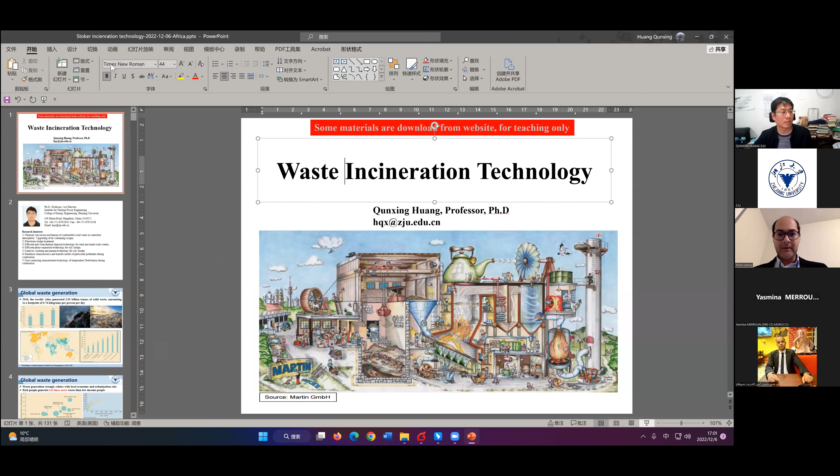It's my great pleasure to give a brief introduction about waste incineration technology. I would like to share my slides. Let me see how I can share slides. Okay, I hope you can see my screen. Okay, perfect, good. Excellent, very good. It's a full screen now. That's good, thank you very much.

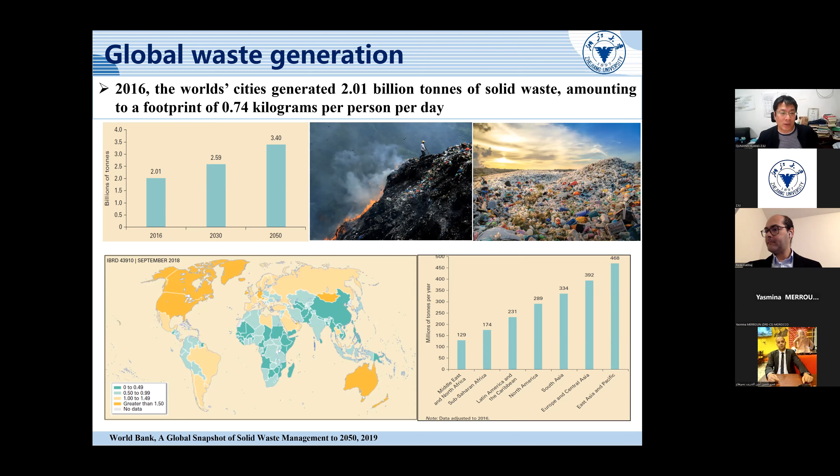A brief information about waste generation globally - I think yesterday Professor Lee already gave you this information, so I would like to move quickly. One point about global waste generation is that the value or mass discharged by every person is closely connected with local GDP. As you can see from the distribution of this waste, richer people discharge more waste, and more metal and recovered or valuable materials are contained in the solid waste.

Also you can see globally the treatment of solid waste - this information was provided by World Bank. I provided the original reference link here, so if you like, you can find the original information from the World Bank report. Overall, the waste to energy or waste incineration fraction is relatively low, only 11% globally.

But in some developed countries, especially China, Europe, and Japan, the waste incineration ratio is much higher, over 50%. Also in some countries, dumping still exists, especially non-sanitary dumping. For waste treatment or waste thermal treatment technology, comparing with other technology, waste incineration is like an industrial technology.

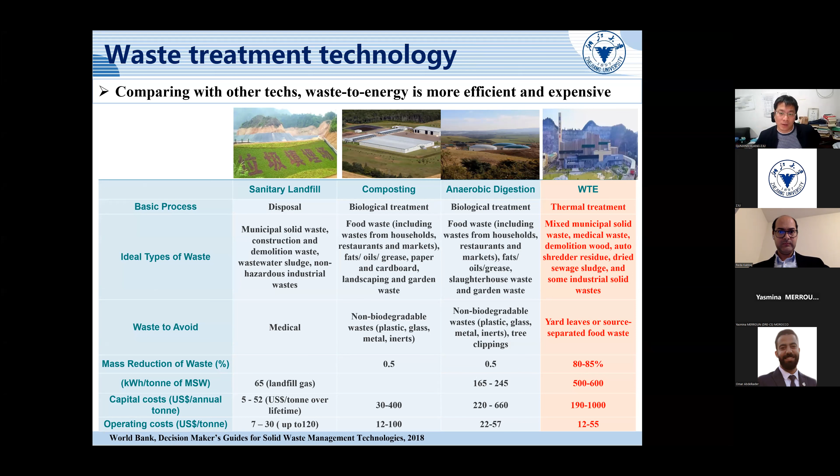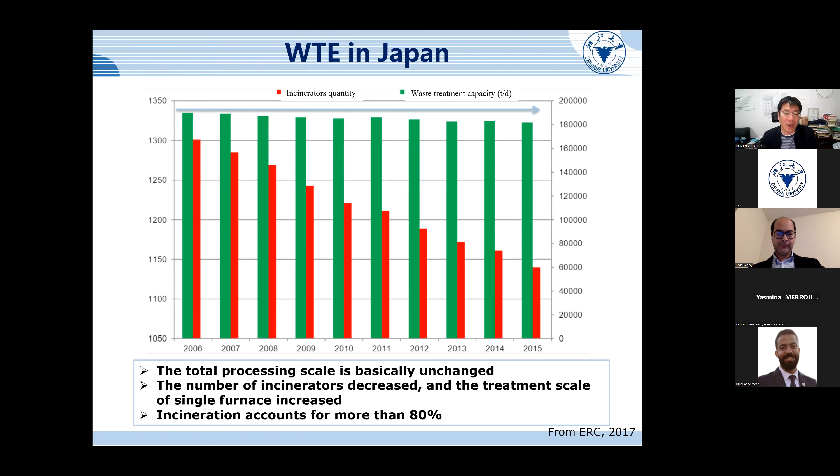In China, approximately 0.8 kilogram of waste is discharged per person per day. For example, in the city where our university is located, Hangzhou, we have about 10 million people living in the city, and approximately 10,000 tons of waste is discharged every day. All this waste is now incinerated, and the bottom ash, fly ash, or solid residue is submitted for landfilling.

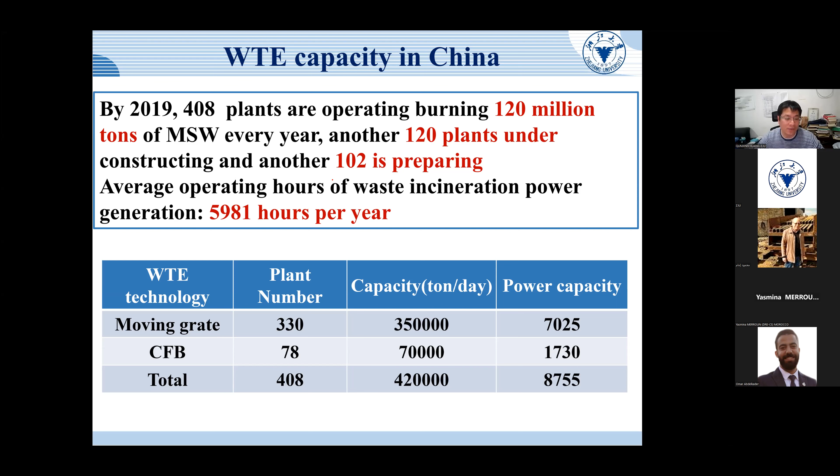In China, we have different technologies, and by 2019, we had approximately 400 plants under operation, with another 120 plants under construction, and 60% of all the waste discharged in China was submitted for incineration.

In order to improve and monitor the operation of these waste to energy plants, our government has built a website. From this website, you can see all the plants and how they are operating, including the temperature inside the furnace, and also the emissions of pollutants including particles, acid gases, and carbon monoxide. You can see what the emission data is.

It's continuous data, and you can see at all times how many incinerators are operating, and what the temperatures are, at each spot. Each spot represents a plant, and if you click on the website, you can find all this information, which is very helpful for the public to know how the plant is running, whether there's any problem, and how the emissions are.

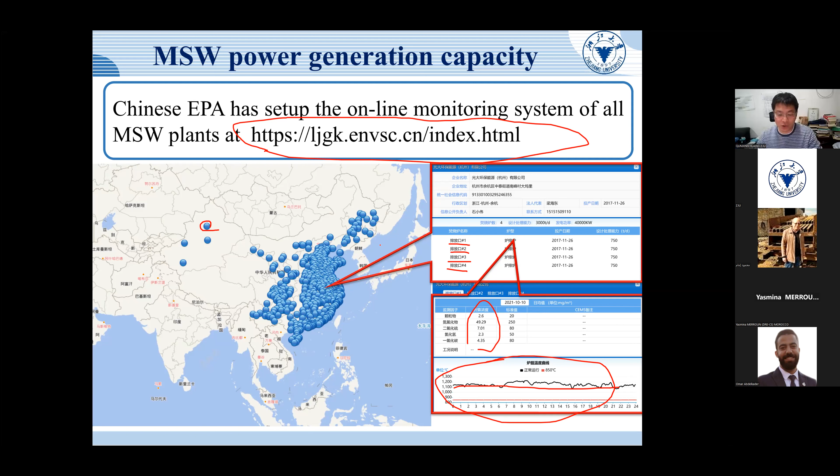There are two main technologies widely used in China for waste to energy. The first is moving grate technology, which is provided by many companies, like the technology from Everbright, and also from Martin Sanfeng and from SUS from Shanghai, among others. For the moving grate, we also have different technologies, like reciprocating, inclined, and staged moving grates.

After burning, the thermal energy contained in the high-temperature flue gas was used to generate steam, and the steam was used to generate electricity or directly sent to local residents for heating or to plants for other utilization purposes.

After the temperature of the flue gas is reduced by the exchangers, the dirty flue gas is submitted to air pollution control systems, including the scrubber, the activated carbon injector unit, and the baghouse to remove the particulate matter. Then the flue gas is induced to the stack and released to the air.

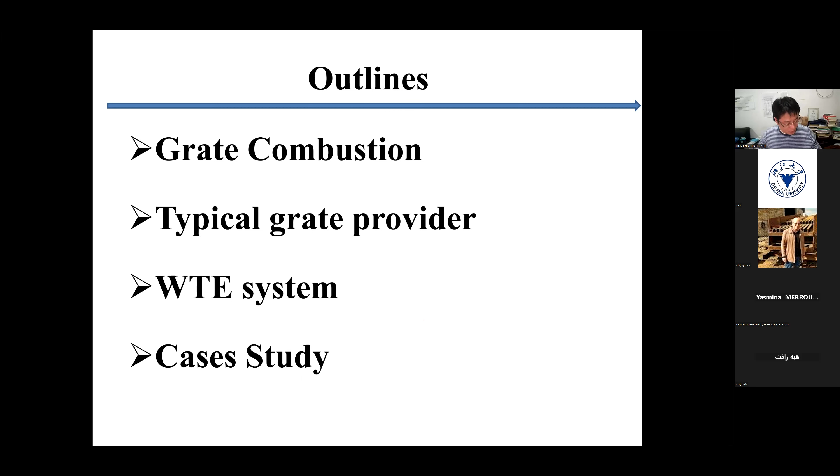Here is the waste to energy. When we are using thermal technology to treat solid waste, it can usually be classified into combustion, gasification, or pyrolysis technology. For direct combustion or incineration technology, the waste is directly burned out. A lot of air is injected into the incinerators, and all the organic matter contained in the municipal waste is burned out and becomes carbon dioxide, steam, and ash, and then the flue gas is cleaned.

Another waste to energy solution using thermal technology is to gasify or pyrolyze the waste into syngas or oils. The syngas and oil are cleaned and then burned to get energy, or to get extra oils like pyrolysis oil, which can be used in internal combustion engines or other industrial boilers for supplying energy or heat.

You can see these two technologies are different. Currently, combustion technology or direct mass incineration technology is more industrialized. For gasification and pyrolysis, there are several plants operating, but the scale is relatively small compared to the combustion systems.

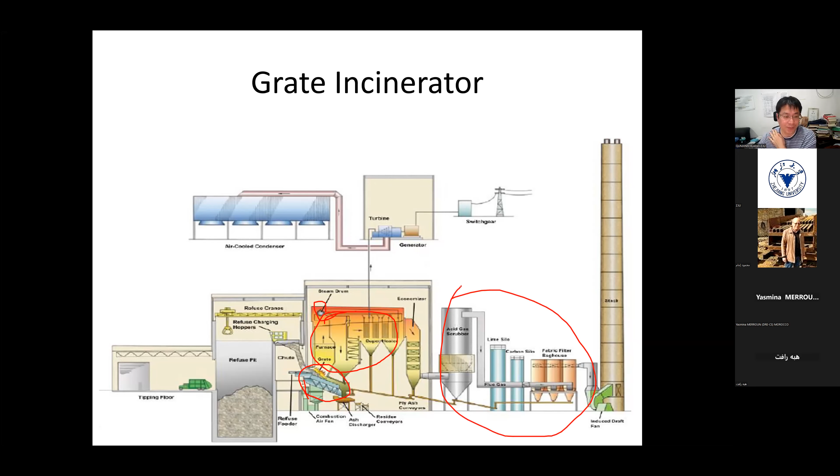The waste is pre-treated. In order to use a circulating fluidized bed incinerator, the waste must be shredded to reduce its particle size and to make the waste more uniform in moisture and more uniform in heating value.

And so because for the circulating fluidized bed, the incineration strength or the intensity of the heat and mass transfer inside the incinerator is much stronger than that in the grate, the particle size has to be reduced to make the incineration more uniform and more well.

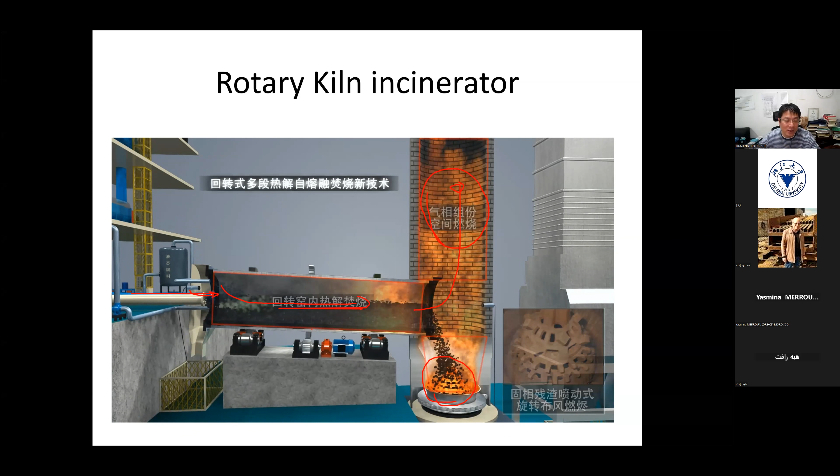So it's three different incineration technologies: moving grate, circulating fluidized bed, and the rotary kiln, which are suitable for different waste. And all these technologies are well commercialized in China. We have many plants using this incineration technology in China.

And sorry for the big noise.

After burning, the bottom ash is discharged into a water-cooled bottom ash collector. After cooling, the bottom ash is submitted for material recovery, and the ferrous and non-ferrous metals or the glass can be recovered from the bottom ash. Then the flue gas is induced by the induced fan for heat recovery to generate steam and electricity.

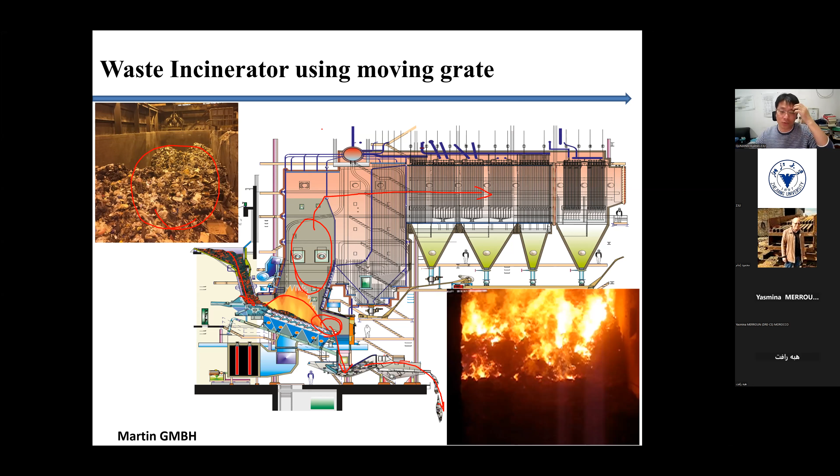Here you can see what was happening in a moving grate incinerator. After the waste is fed in, it will induce drying and pyrolysis and partial combustion, and then the fixed carbon is burned out. Some volatiles will be burned out with the secondary air. The primary air is submitted from the bottom of the moving grate.

There are very small holes, and the primary air is injected through these holes inside the furnace, and then secondary air is injected through the front and rear walls. With the secondary air, the flue gas is burned out, and then you can get very high temperature, approximately 950 degrees. The flue gas will be used for heat recovery.

And here is the distribution of the gas species, including carbon dioxide, carbon monoxide, and oxygen, and also the volatiles, especially volatiles. When the waste is heated by the flue gas under the flame, it will be pyrolyzed. A lot of the volatiles will be devolatilized into the furnace.

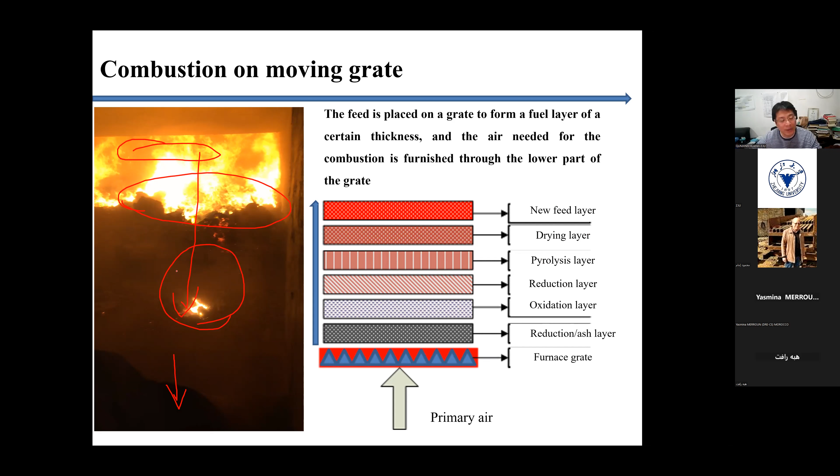Here you can see the combustion of the flame. After burning, you can get the ash layer, oxidation layer, reducing layer, pyrolysis layer, drying layer, and the new feeding layer from these structures. The waste is fed from this area, and after drying, it starts burning, and then the bottom ash is burned out and discharged at this place. This is what was happening to the waste inside the incinerator.

In the next few slides, I would like to give a brief introduction about the different moving grate technologies, and also share several cases of plants using moving grate technology. Here you can see the very old chain grate stokers. It's like a chain, and it's forward moving. It's like a horizontal moving grate, but it's using a chain as the grate.

You can see the waste is fed here, and as the chain moves forward, it is burned out, and the primary air is fed in from the bottom. From here, you can see the air is injected, and this is the chain inside. The waste is fed from this part, and after incinerating, the bottom ash is discharged from this place.

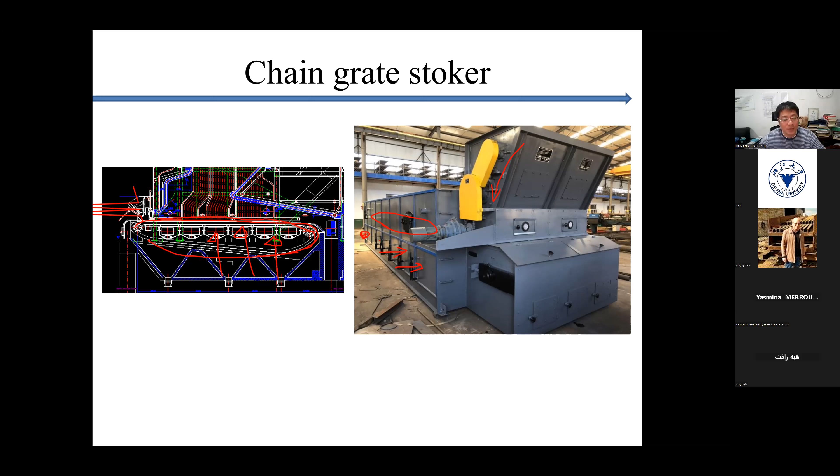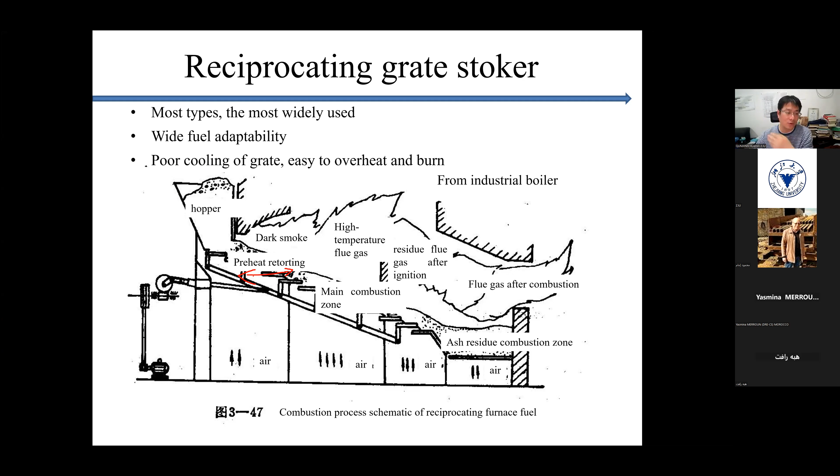Another grate technology is the reciprocating grate. The waste is moving from the back, and the incinerator grate is moving forward and backward, and it can be separated into several stages. Currently the technology from Mitsubishi, from Martin, is using this technology.

Here is the grate structure of the grate pieces. You can see this is a moving grate. It is moving forward and backward, and the air is injected from these small holes. We also have the fixed grate, which is not moving, and the movable grate. After moving, the waste piled up on this grate is moved forward, and then it is heated up and starts drying and burning out.

The moving distance of this technology is controlled between 30 to 100 millimeters, and it's moving very slowly, 1 to 5 times per minute. The thickness of the waste on the moving grate is over 500 millimeters; sometimes it could reach 1 meter high, with a lot of waste piled up. The grate ventilation area is also a very important parameter, calculated as the area of these small holes divided by the cross section of the moving grate.

You can see the picture of the water-cooled reciprocating moving grate provided by a German company, Martin. You can find this information on their website. These are water-cooled pipes. Inside the pipes there is saturated high-pressure water, which absorbs the heat released by the municipal solid waste during incineration. The water becomes superheated steam, which is then used for electricity generation by a turbine.

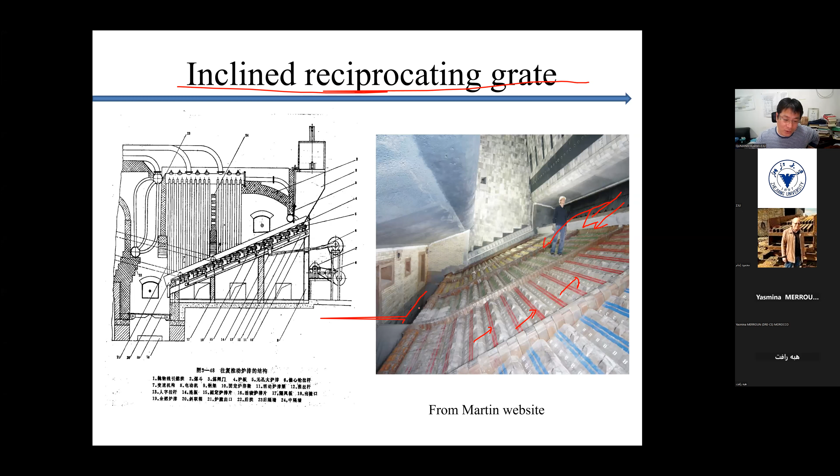Here is the place where the gas is discharged. You can see the waste coming down, burning and burning out, and then the unburned residue is rolling down to the discharge part. From this picture you can see very clearly the refractory materials. Unlike this one, here is the water steam pipe. Here are the refractory walls.

When the refractory wall is used, the heating value of the waste is relatively lower than in an incinerator using these water steam pipes. Because in order to help the burnout or maintain the temperature inside the incinerator, we want to reduce the heat absorbed by the steam. So you cover the water pipes with refractory materials to maintain the temperature inside the furnace.

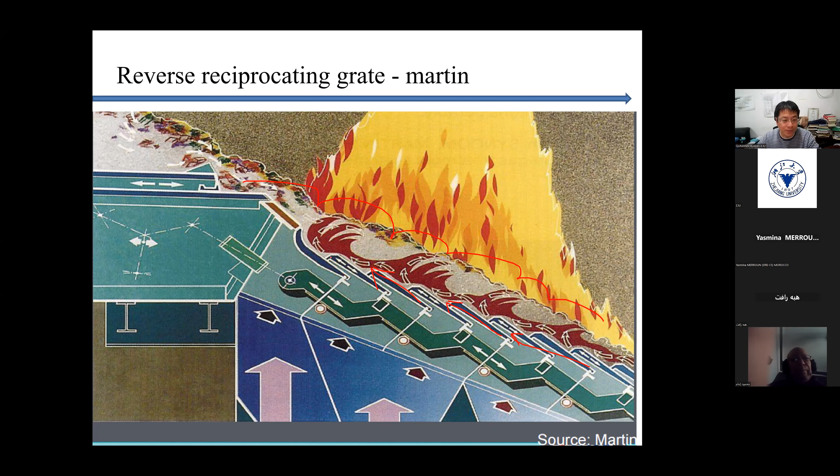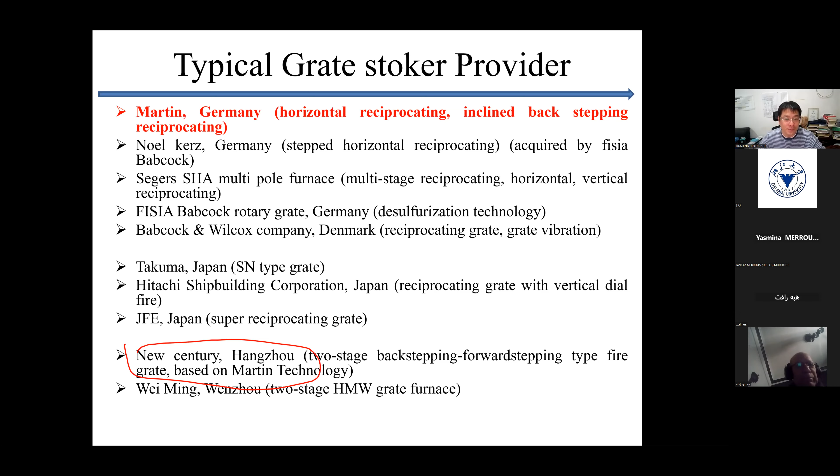And then in the following several slides, I would like to introduce several typical grate providers, from Martin, from Noel Kerz, and also several local companies in China like New Century. Martin, from Germany, is the largest moving grid provider in the world, and their technology has been widely used globally, especially in Europe and also in China. As I have mentioned, approximately 30% of the moving grids are using the licensed technology.

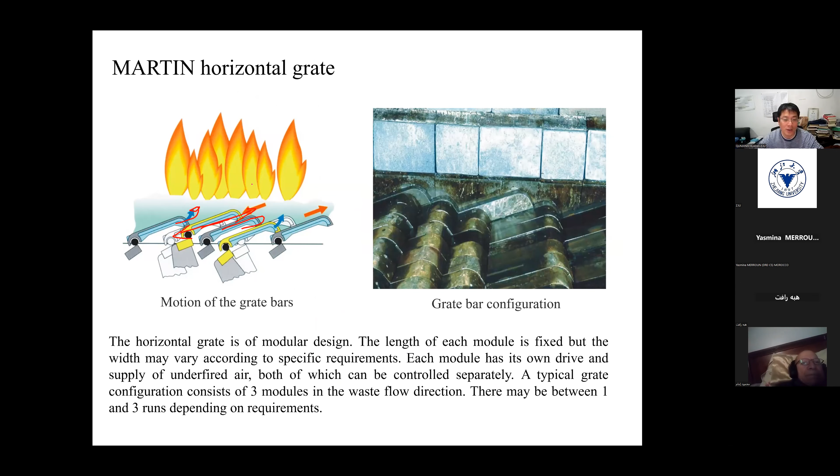And this is a grate picture and how it is. This is fixed and this is moving. And the air is coming out from here. This moving grid moves forward and backward, and the waste is pushed forward and burned out. And here you can see, as I have mentioned, it is water cooled, so the cooling water comes in and then comes out.

It comes out from here. And why are we using water cooling? Because if you are burning very high temperature waste, the temperature of these grate materials must be kept lower than 450 degrees. So we have to use water cooling. Otherwise, it can be broken after 2 or 3 years of usage.

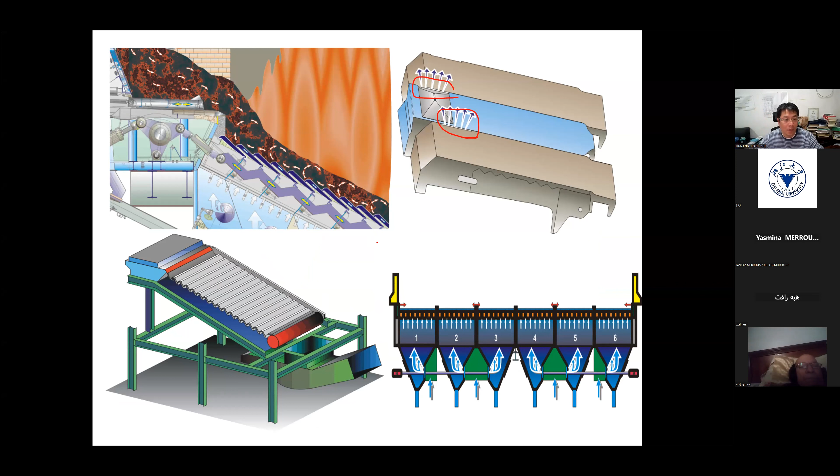for the treatment. And this is how the air is coming out from the holes, small holes, ventilation holes, and also the moving directions. And several units. Here is a 6 unit. You can see each unit can be constructed very quickly, and it is modularized. Very easy. You can build such a moving grate incinerator very quickly. And 2 workers, maybe 1 week, you can finish the construction of these moving grate incinerators.

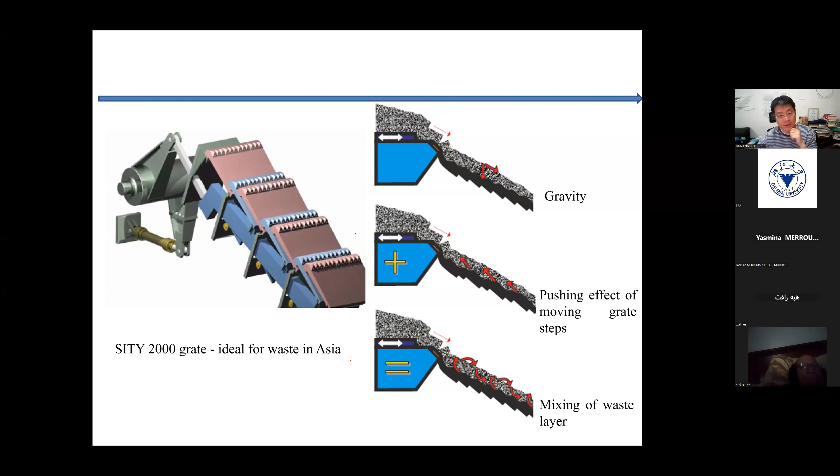And the cylinders, which are used to push the waste and push the moving grate. Here you can see how the reciprocating moving grate is used for the low heating value waste, with high moisture waste. And several cities are using this technology, like Chongqing. Chongqing is getting the license from Martin, and they're using this technology. They have 2 incinerators. Each incinerator has a capacity of 600 tons per day.

And you can see the waste, the received waste. Here is the waste received. After we get the waste in China, because it contains relatively high moisture, the waste is put in the pit for a few days, and then the moisture will be reduced from 40 to 25%, and approximately 15 to 20% of the leachate is discharged from the pit. And then the heating value of the waste can reach 7 megajoules per kilogram. Then this waste is submitted to the incinerator for burning.

After burning, we can get approximately 60 tons of steam per hour, and this steam will be used to generate 24 megawatts of electricity, and this electricity will be used for local residents.

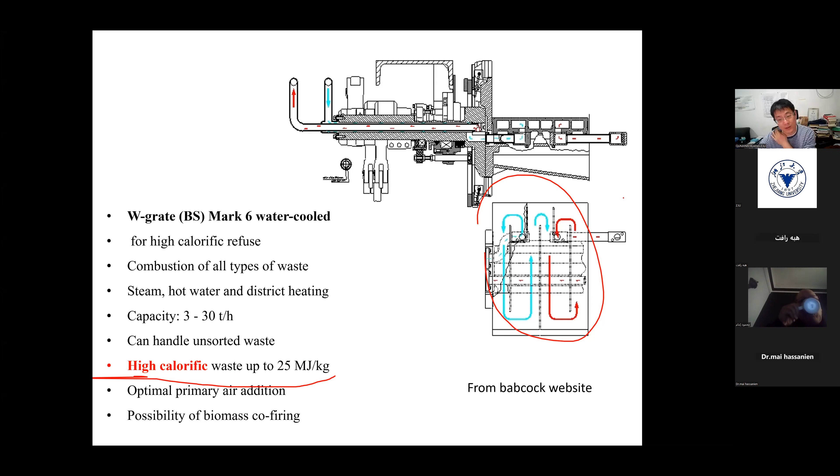And another technology, also from the Europeans, was from Denmark, Vølund. It's also providing the moving grate with water cooling. This is water cooled design and non-water cooled designs. And you can see here it was used for high calorific waste, which is up to 25 megajoules per kilogram. The cooling water comes in, and after cooling, the high temperature saturated water comes out. And this saturated water is also submitted for the superheated steam generation.

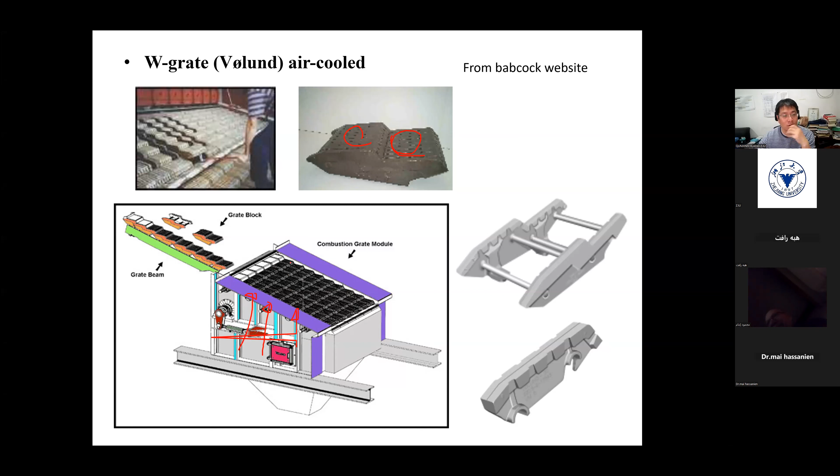You can see the design of this Vølund air-cooled moving grate is different. The size and the shape of the moving grate from different countries are usually totally different, especially for the ventilation holes. You can see here the hole area and the hole size and shape are different from different companies. But all these holes are used for the primary air, and all primary air is injected from the bottom of this moving grate. This is the water cooled one.

And here they also provided the vibrating grate. You can see it is vibrating, and when the waste or the biomass is piled up on the surface of this moving grate, it's vibrating, hopping forward, and then after hopping, the air is well mixed with all the waste on the surface of the moving grate and burned up completely.

And here you can see a typical design used for packed biomass incineration. You can see the packed waste is shredded and fed through screw feeders, and then it catches fire and burns out, and then superheated steam is generated for electricity. From here you can see the temperature when burning biomass. The temperature is much higher.

The steam temperature is much higher, approximately 150 degrees higher than that generated from municipal solid waste incinerators. Because when municipal solid waste is burning, the waste contains a very high concentration of chlorine. Chlorine can cause very serious corrosion problems if the steam temperature is over 500 centigrade degrees. So usually the temperature was relatively low.

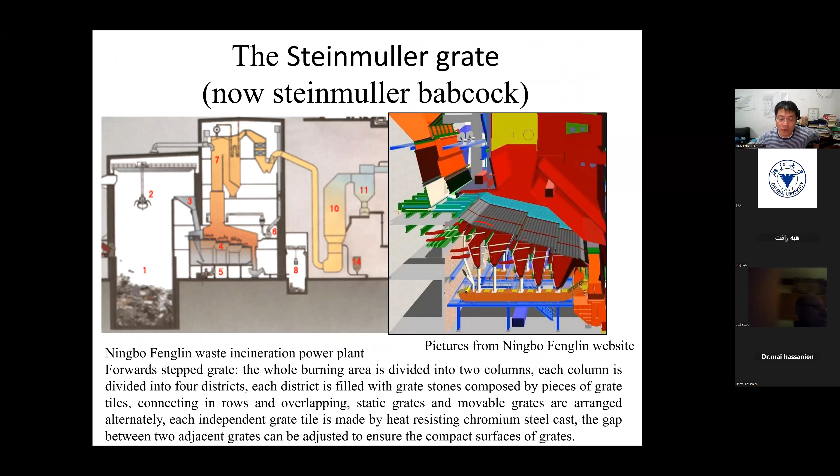And here you can see the cross section of this plant. Its waste is piled up, and then it's fed inside the furnace and burned out. You can see the layout of the heat exchanger.

It's a horizontal layout, so the ash deposited on the surface of these exchangers can be well collected at the bottom. It's collected here, and then the collected fly ash can be submitted for landfilling or sanitary treatment, because it is classified as hazardous waste.

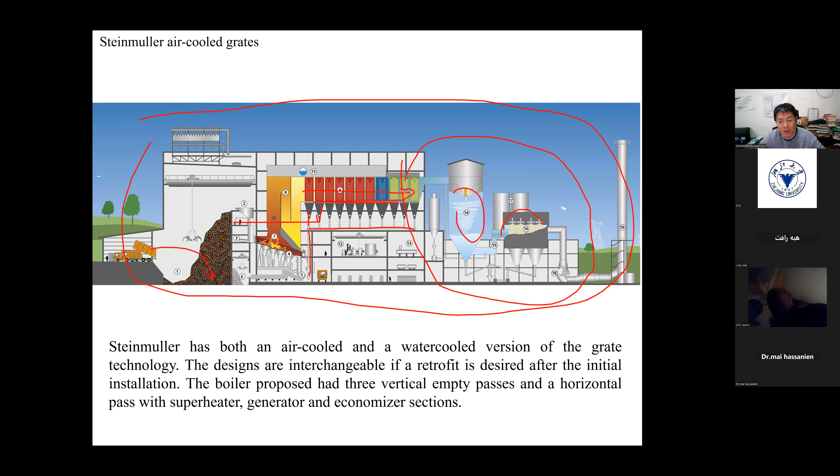And after the heat exchanging, the dirty flue gas is treated with a scrubber, the baghouse, and the lime and active carbon injection unit. The active carbon is used for dioxins and also volatile heavy metals adsorption.

For this design, the moving grate is moved forward, backward, and also up and down. So it's not only horizontal motion, but also vertical motion to help mix the waste with the primary air, and also to help the burnout.

By using this technology, the burnout ratio of the municipal solid waste is pretty much higher, and the carbon contained in the bottom ash can be lower than 1 or 0.5%.

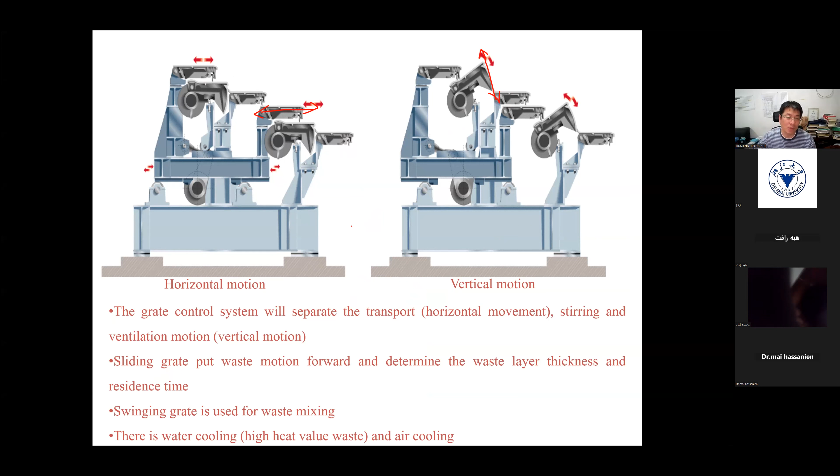In China, we also have a similar technology, which was imported from Japan, very similar to the technology from Europe. It's also a staged moving grate technology, and in order to enhance the mixture, there will be some distance between the two stages.

After when the waste is rolling down, it will get mixed, and then that can help the burnout of this waste.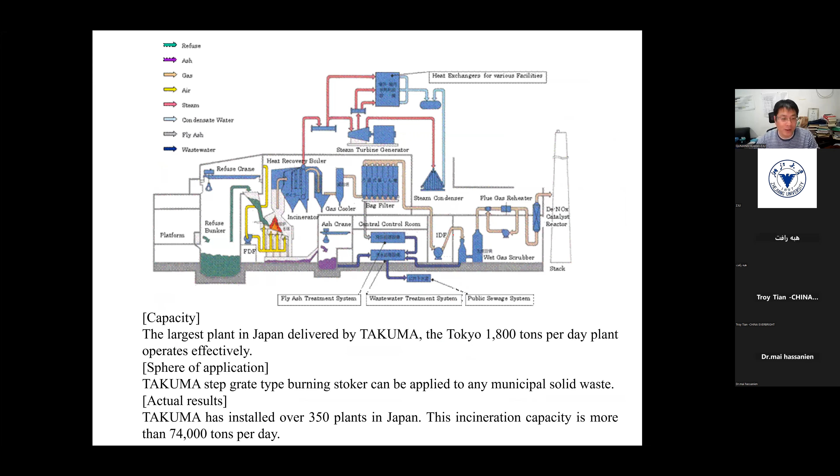Here you can see this technology, how it can be used for waste incineration, and also several plants in Japan, especially the plant in Tokyo, 1,800 tons per day, which is using this Takuma technology.

Another worldwide technology is from Hitachi Zosen. It's using the Von Roll moving grid technology for their incineration technology. It's very similar - the waste is received and fed inside the furnace, and the flue gas is used for heat exchange.

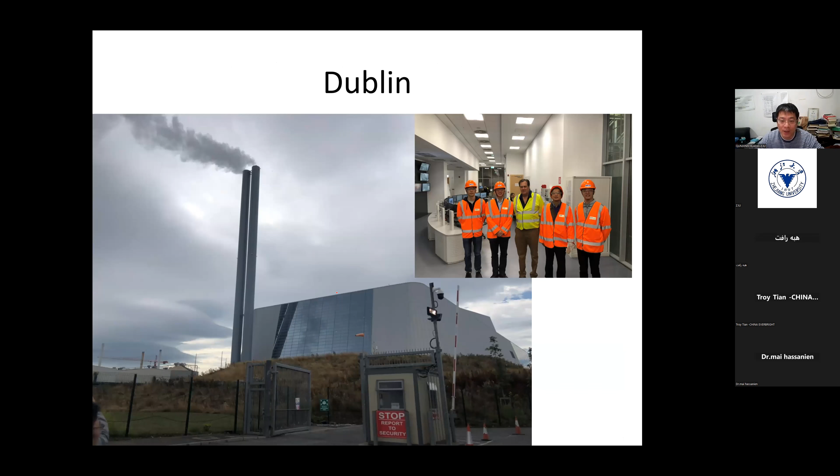But their moving grid is a little bit different, controlling the extra air and also the recirculating of the flue gas. This is a plant using this technology located in Dublin, which was put into operation in 2016. I visited this plant in 2017 - it's 2,000 tons per day, and they are using the technology provided by Hitachi Zosen.

By using their technology, the excessive air ratio is much lower than other technologies. It's ranging from 1.3 to 1.5. For other technology, usually the excess air ratio exceeds 1.6 to 1.7.

So if the volume of the flue gas is reduced, the overall heat recovery efficiency can be increased. You can see here the boiler efficiency reached 90%. Usually, the boiler efficiency ranges from 80 to 85%, but for their technology, it can reach 90% by reducing the excess air ratio.

And also, more electricity can be generated after the boiler efficiency is improved. This is the moving grid that they use.

Another technology widely used in China is provided by JFE, Japan Holding Steel Corporation. They are using the super reciprocating grid. Similar to the idea of Hitachi Zosen, they also reduce the excessive air ratio to 1.32, and they do high temperature secondary air injection and recirculating of the flue gas.

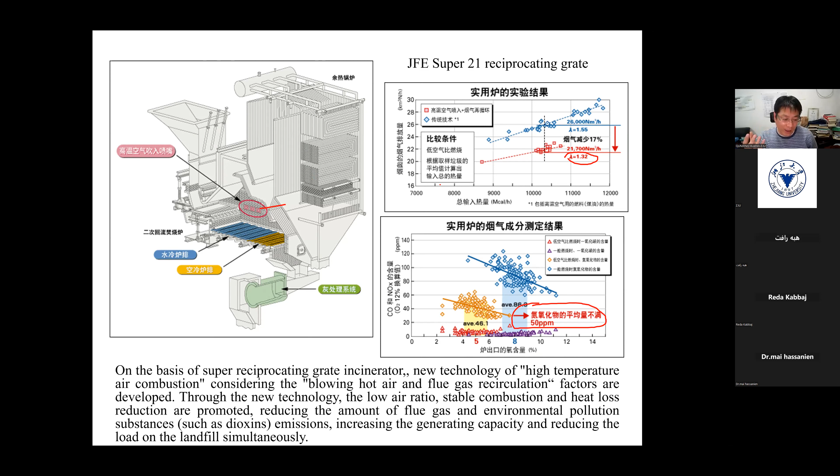And then you have to use SCR or SNCR to take care of these special acid gases. In China, we also have two local companies like New Century, which is located also in Hangzhou.

They got the license from Martin, and then did some redevelopment, adding another stage at the bottom of this moving grid. This is a reverse moving grid, and this is the forward moving grid. They combined the reverse and forward moving grids together to help burn out low quality municipal solid waste, so they can burn waste with much lower heating values, like 3.6 to 4 megajoules per kilogram.

The feeding waste moisture can reach 40 to 45%, almost half of the waste is moist. By using this two-stage design, they can still burn very well.

I still have several minutes, so I'd like to give a brief introduction of the systems. We've introduced the moving grid technology, and now you can see the whole system for a plant, for one waste-to-energy unit.

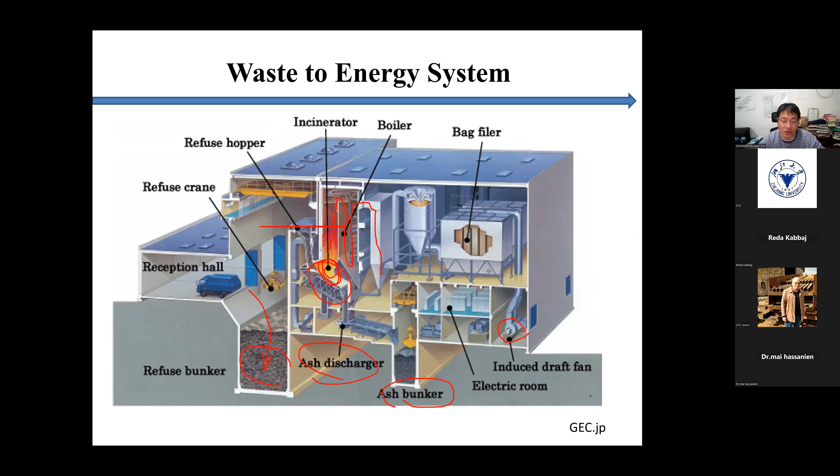Here is the reception hall. Waste travels by truck to this hall, then is fitted into the bunker or pit. The crane is used for feeding the hoppers, and then it's pushed into the incinerator. After burning, the high temperature flue gas is cooled down by the boilers through heat exchangers, and then it is subject to the APC systems. The bottom ash is discharged here, fly ash is collected here, and the induced fan works here to induce the flow and clean the flue gas to the stackers. For each waste incineration system, we need bag filters to collect the very fine particles.

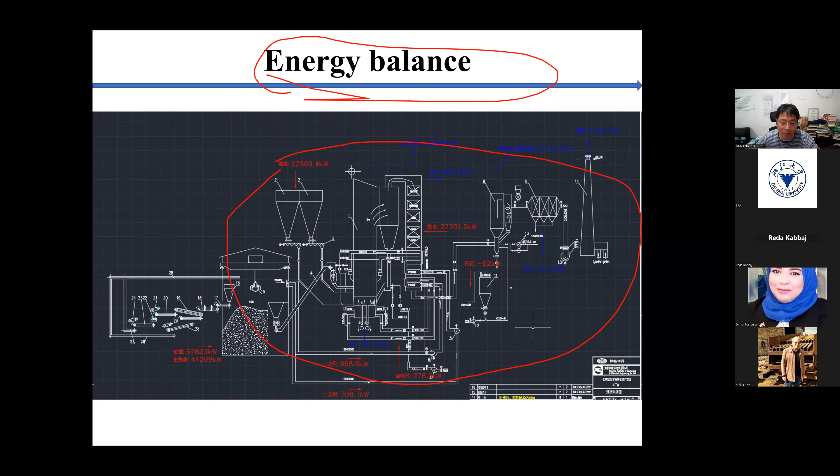After mass balance, we also need to calculate the energy balance. This calculates how much electricity and superheated steam is generated, and how much heat is wasted through the flue gas discharged by the stack and the bottom ash. It's also used to calculate how much electricity is consumed by the system itself. We get a lot of electricity generated, but some 10 to 15% of this electricity is used by the incineration system itself for the feeding, the moving grid, the induced fan, and bottom ash discharge.

Also, in order to calculate how much electricity can be generated through the Rankine cycle, we also have to do thermodynamic calculations. Using these calculations, we can see the boiler efficiency and how much superheated steam can be used for electricity generation.

In addition to mass balance, energy balance, and thermodynamic calculations, another very important aspect is the combustion control system. We use a lot of monitors - temperature monitors, pressure monitors, and mass flow sensors - for system monitoring. We also use distributed control systems to run the whole plant. Usually, like in Dublin, the whole system can run by itself, so the only thing operators need to do is take care of the feeding and the bottom ash. The whole system can run by itself.

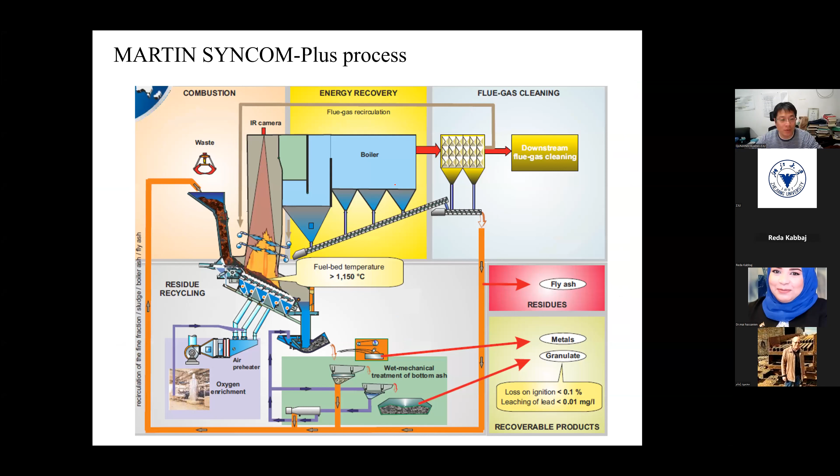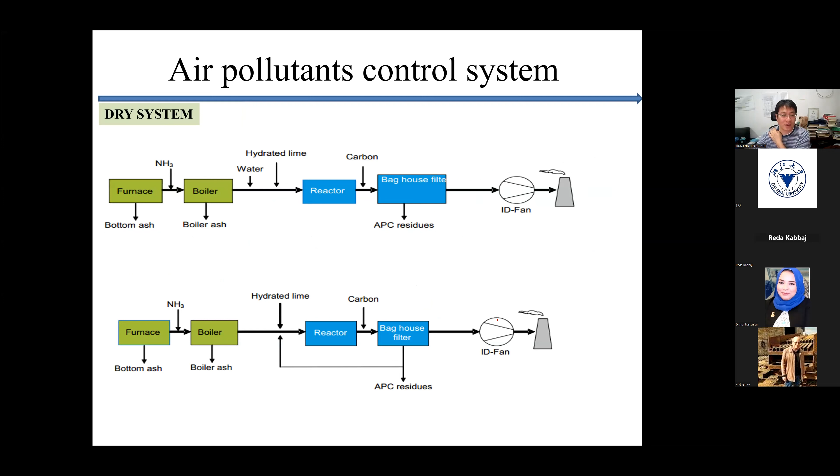This involves semi-dry systems and also dry systems. We also use a baghouse for particle removal, and ESP, electrostatic precipitator removal systems, for very fine particles contained in the flue gas.

And also for the bigger particles, sometimes you use cyclones, especially for circulating fluidized bed incinerators. We use cyclones to remove the

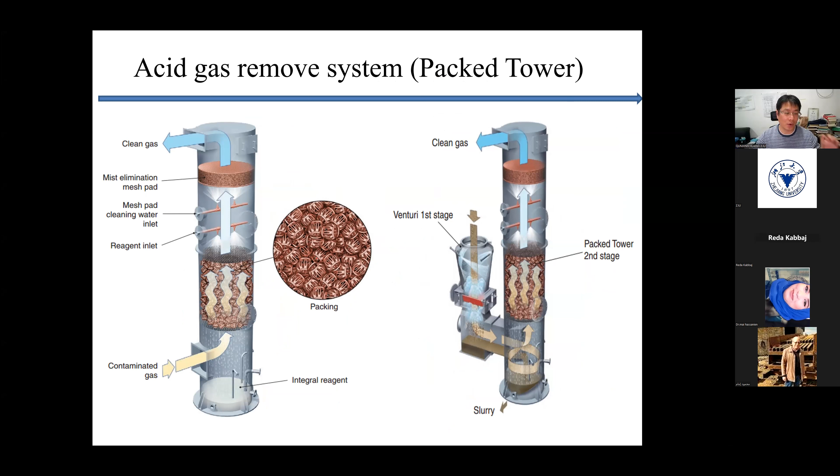high density particles contained in the flue gas. The acid gas systems - acid gas scrubber, wet scrubber, and also packed towers - help with moisture and the flue gas exchange to improve the acid gas removal efficiency.

And nitrogen oxide removal, using catalytic nitrogen oxide removing systems. Here we use catalysts and also use reductants to help reduce the nitrogen oxide to nitrogen.

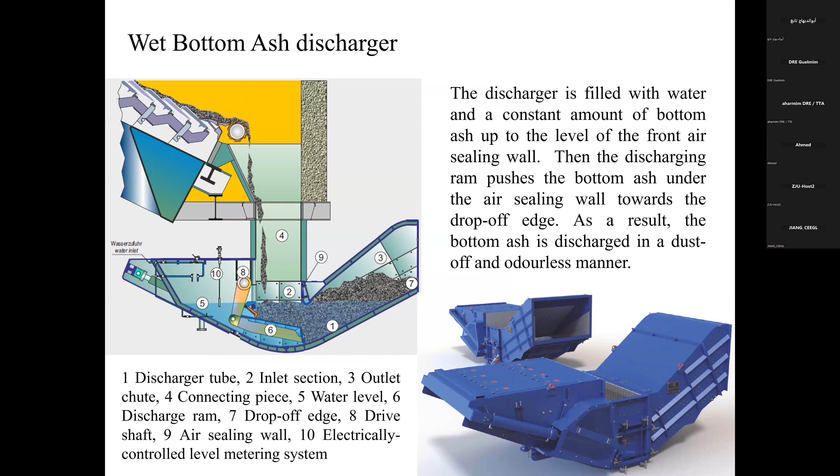The bottom ash discharge unit collects the bottom ash, for materials recovery - ferrous and non-ferrous materials. So here you have several pictures and several cases. I would like to move very quickly through several plants' information worldwide.

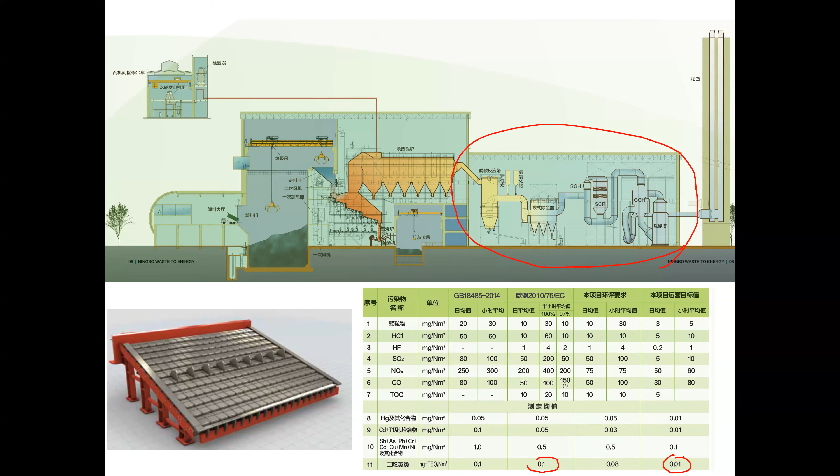For example, for dioxin, the national standard was 0.1. For this plant, it's 0.01. It's very, very low. This technology uses the Von Roll technology supplied by Hitachi Zosen.

Due to limited time, there are several slides I didn't give time to, especially some case studies, and I will share these materials with all students. If you have any problems or questions, we can discuss after this training workshop.

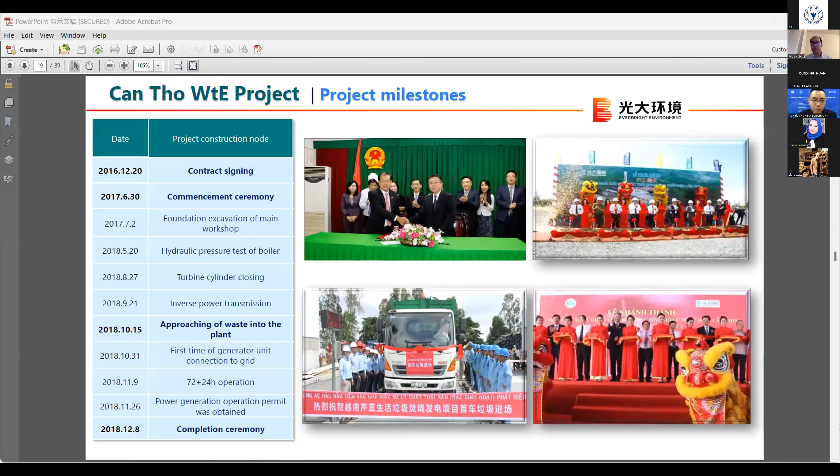I just want to make a very quick introduction that Everbright Environment is one of the largest waste-to-energy developers in China, with 499 environmental protection projects, with an aggregate investment of approximately 23 billion. It was one of the largest waste-to-energy investors and operators, with a total of 168 waste-to-energy projects, with an aggregated designed daily household waste processing capacity of

144,650 tons. Everbright is also one of the strategic partners of the International Coalition for Green Development on the Belt and Road, under the United Nations Environmental Program, and the global convener of the theme of green technology innovation and corporate social responsibility. China Everbright Environment was also invited to promote the formulation of standards for waste-to-energy projects with the World Bank, and they lead the formulation of the global PPP standards for waste-to-energy projects of the United Nations.

During this presentation, we're gonna hear from Mr. Tian his insight in how they implement business model for the waste to energy for the people-first PPP. So, Mr. Tian, the floor is yours.

Thank you, Professor Reda, our moderator. Can everybody hear my sound and see my video and my presentation? Yes, very good. For me, if I hear it, so everyone could hear it. Very good. Okay, thank you again, Professor Reda, our moderator.

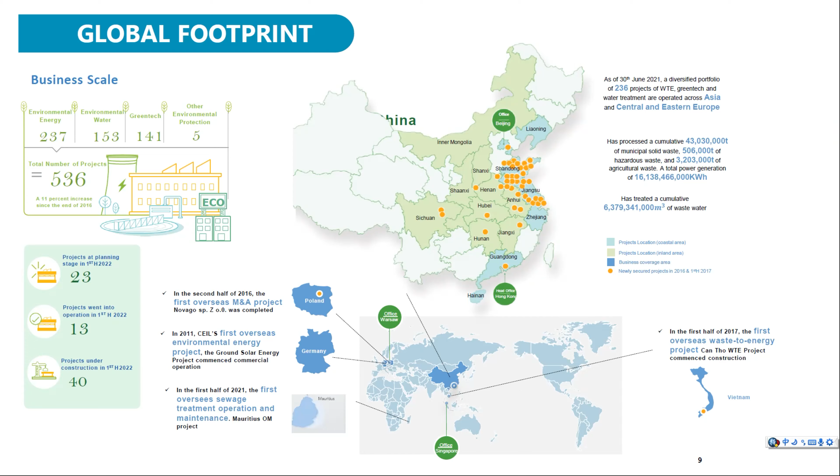And also in 2021, in our water business, we won a contract to provide the operation and maintenance service in Mauritius. So the next slide just lists the 4 international projects we have developed in the past. This first one we call the Can Tho WTE project. This is the first WTE project we successfully developed outside mainland China.

And the latest success we had is in Mauritius. That is the wastewater treatment project. We didn't develop the plant for them. We actually provide our expertise in operation and maintenance and provide such a service to this plant.

Okay, these numbers, I just want to go through them to give you an idea of the capacity of China Everbright Environment. This is only in the solid waste management sector of our business. And in this sector, we almost exclusively use waste incineration technology. I would say this number probably positions us as the largest investor and operator of WTE plants not just in China, but also in the world.

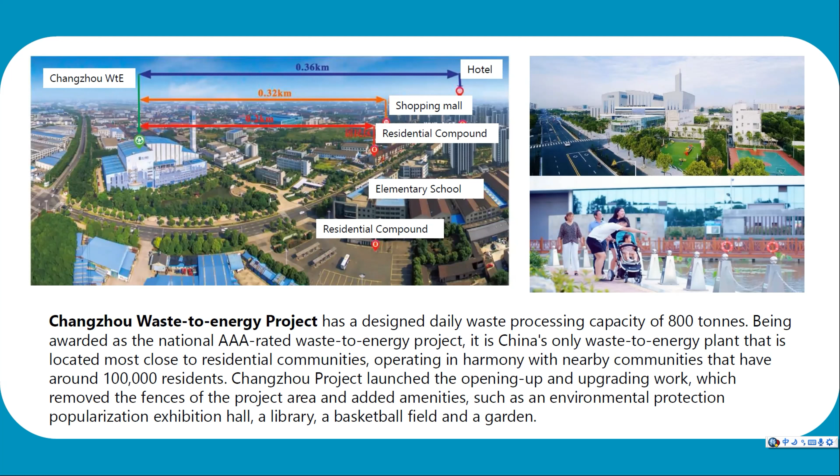The next one I'd like to highlight is called the Hangzhou plant. It's also one of the largest plants we developed in the past. The capacity of this plant, I believe, is more than 3,000 tons per day. That translates to 1 million tons per year. And we also implement very high standards in this plant. I believe the air pollution control we used here is more strict than the currently imposed European standard, the 2010 standard.

So the next highlight I'd like to present to you is another WTE plant we developed for another mega city in China. The city is called Suzhou. I think it's close to Shanghai. So this city has a population of more than 10 million again. And also this is one of the largest plants we ever developed. The plant was phased actually: phase 1, phase 2, phase 3 combined.

I think this is due to the growing demand of the city, because the population is growing and also the economy is growing, the waste generation in that city is also growing pretty fast. So during the very first phase, the capacity could not meet the demand. So at the request of the government, we expanded this plant into phase 2 and into phase 3.

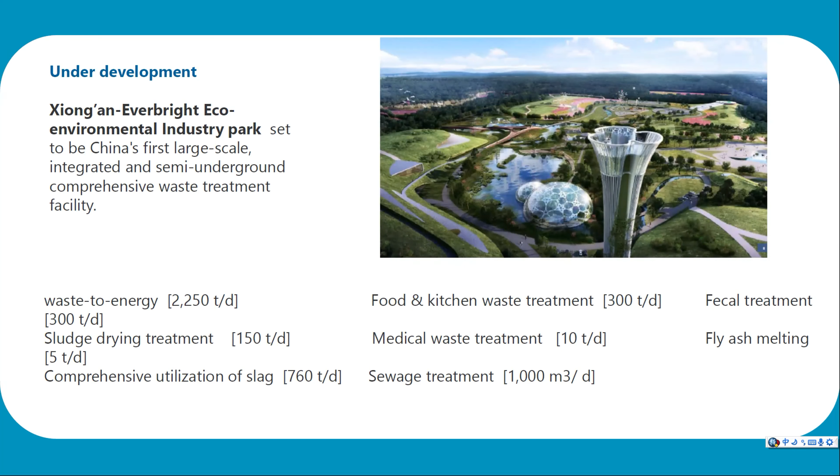Okay, so the next slide. Now I'm going to go through the case study part. I'm going to give you two examples to compare how the WTE business, or in general terms the waste management business, is different in two distinctive regions. One is a developing economy. I think that applies to China, Southeast Asia, and North Africa. The other example is a developed economy. I'll use the European Union, EU, as the example.

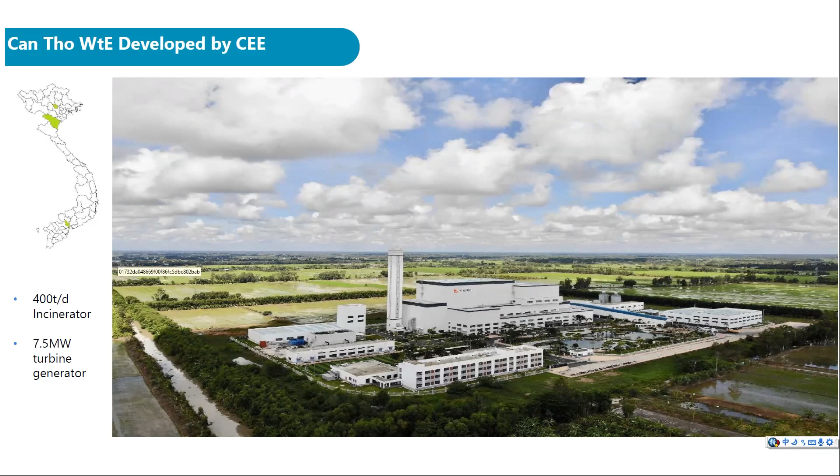So basically, we have a partnership with the Can Tho government, the local government. They have a demand to build such a plant to help them manage the solid waste for that city. So that's where we come in: okay, we can help you build that plant, we can invest money and also operate the plant after it's built. So that's how the partnership looks between us and the government.

So what can the government do? First, they will provide the land. In this case, it's not completely free. I think it's free for the first 15 years, and then they will charge a land rent. But that land rent is a really insignificant cost in the entire cost of the plant. So it's not really important. The rental could be very low, negligible, I would say.

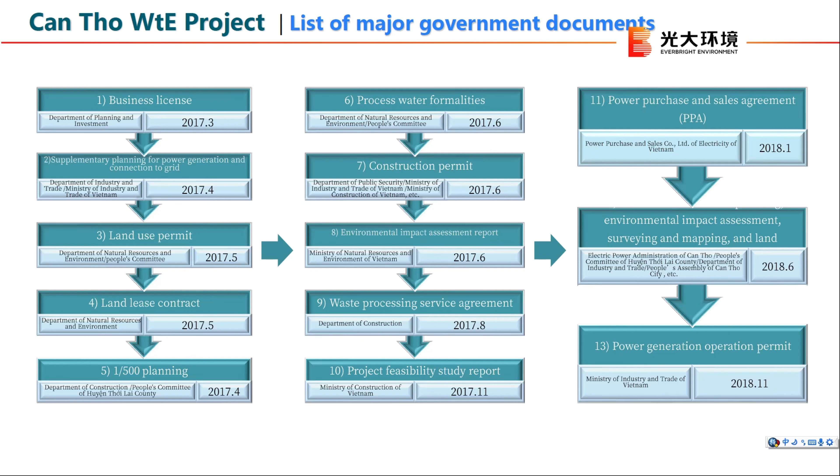Okay, here on this table on the left, you can see some of the very important milestones which we achieved for developing this Can Tho plant. And from the contract signing to the completion of the plant, which means it entered into operation, that took about, I would say, more than 2 years. That's actually in line with the development period for such a plant in China. Of course, I would attribute the smooth development to the cooperation of the local people, and also the support from the local government and also from the central government.

And that's the construction phase of the plants. The entire construction takes a little bit less than 2 years. Again, that's in line with our construction period to build such a plant in China.

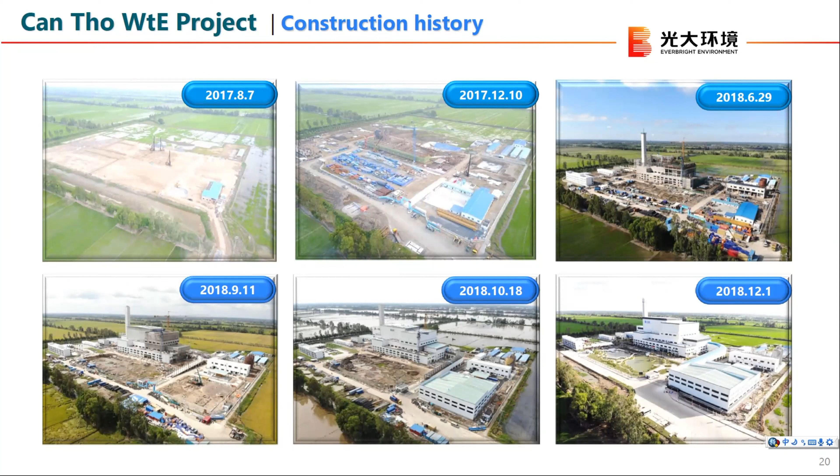The waste truck comes in and unloads waste into our bunker. In Can Tho and in China, usually it takes up to 7 days of storage because the waste in China and some Asian countries has pretty high moisture content. So we wait up to 7 days to let the moisture discharge. This moisture, if you put too much into our incinerator, will negatively impact incineration efficiency. So that's why we wait such a long time to let the waste dry up a little bit.

Once it dries up enough, we use a scraper to move the waste into the feeder and into the moving grate incinerators. In each section, they burn differently until they turn into ash. During that process they produce hot energy, and we use this energy to heat up the boilers.

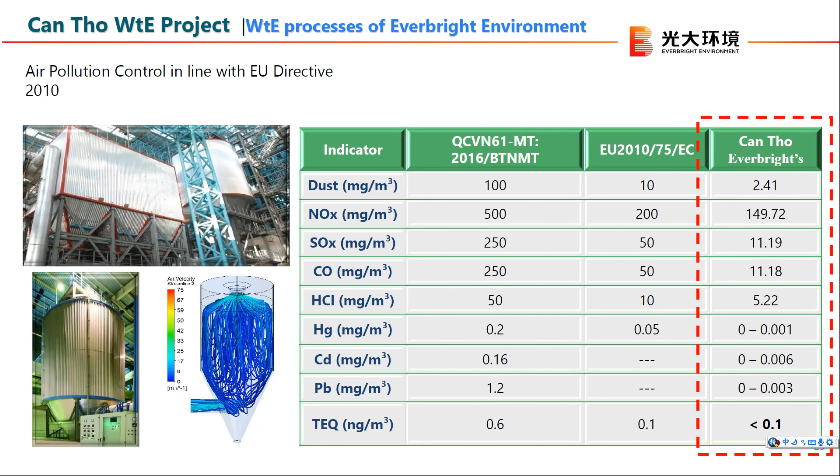Eventually they call this RO, reverse osmosis. The water effluent is really clean. So in China, the Everbright plant and also the Can Tho plant, our objective and also our practice is to fully treat all this leachate produced in the waste, and also fully recycle this water, put it into plant use, and also do additional filtration so that it can be safely used in the boiler.

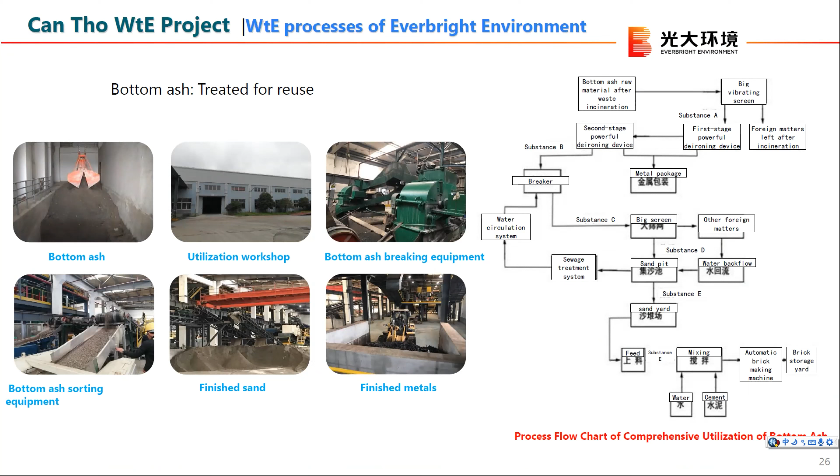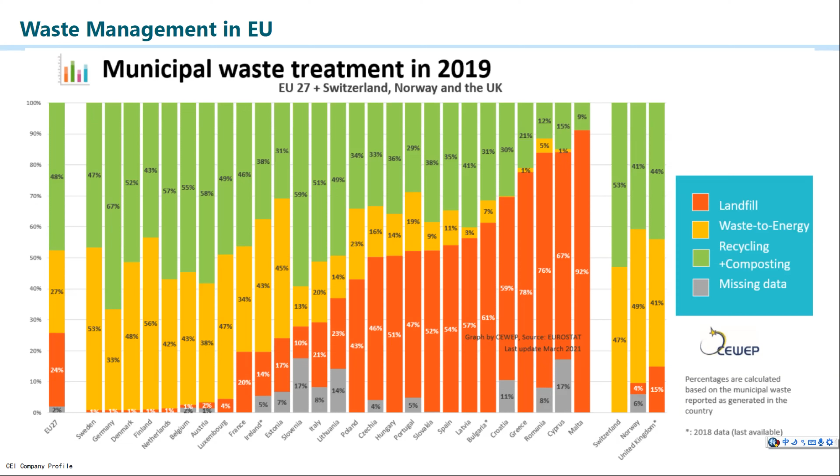That's why, in the later part of my slides, you'll see a trend in the last 10 years of WTE plants being built pretty rapidly in those countries. I'll give the example of Poland, because that's where China Everbright is present in the EU.

Here I'll spend 2-3 minutes on what China Everbright is doing in Poland. As I said before, in 2016 we acquired a waste management company, Novago, in Poland, but they're not using WTE thermal technologies to treat waste. We're using a more widely used method in Europe called MBT - mechanical biological treatment.

Currently we have 6 plants in Poland using this MBT to treat waste. A portion of that cannot be recovered or reused and goes to landfill, and a portion we use to produce RDF, which we send to cement plants as fuel for them.

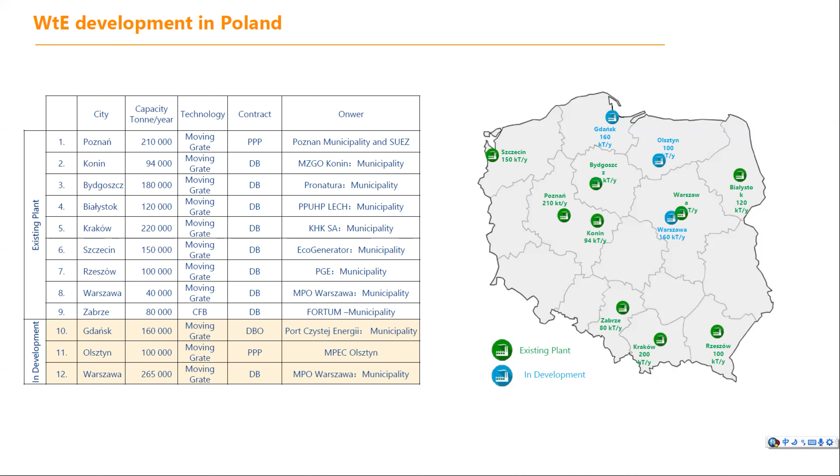The waste gate fee is a market-driven price. It really depends on your demand and supply. That will determine how much the waste producer is willing to pay you to get rid of that waste. And on the other end of the revenue, which is the energy sale, again, that is determined by the market, how much the energy users are willing to pay to buy that energy. So that's the two ends. It's very different. There's no guarantee. It's all market price. So that's the difference.

Okay, here is just one of the WTE plants, how they look in Poland. This plant is called Konin. It's not owned by China Everbright. We don't have any WTE plants in Poland. So that's owned by the local government. It's another small city. It's small by Chinese standards, but it's not small in Poland. I think it's a pretty medium-sized city in Poland, Konin.

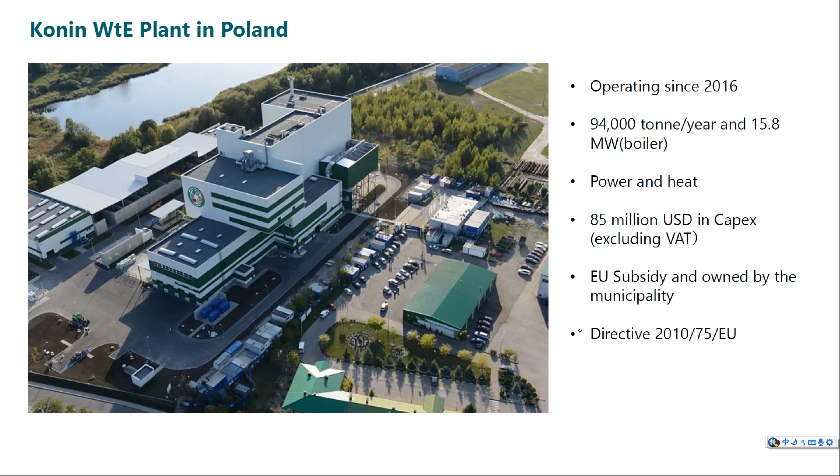And in the EU, the government involvement is smaller, and also the incentive for government to build such a plant is much smaller than in other developing countries. They have the plants already, so they usually don't have the urgency to build another plant.

And also they will receive protests and complaints from local government, which also reduces their determination to build more plants. So that's the idea. And that 6 years actually is if everything proceeds smoothly. If there's other uncertainty involved, for example protests, the process will take much longer than the 6 years we propose.

Actually, I would like to share one example: in Poland, there's one project called Kamianka that we tried to develop in past years. The permitting for the Kamianka project first started in 2010, so that's almost 10 years ago, and it's still in the public hearing stage, because it continuously receives unwanted attention from environmental organizations.

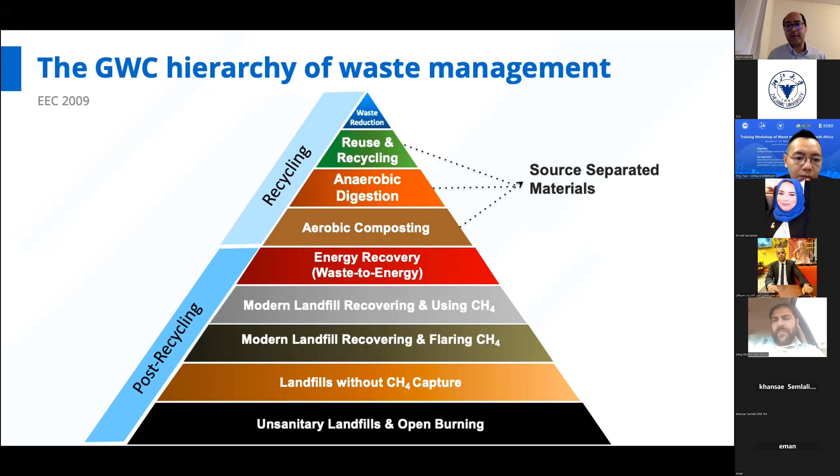And also in Morocco, we have our partner, IRESEN, which is an entity founded by the Ministry of Energy, focusing on solar and new energy. So we also welcome all the members of the Moroccan team to join our association.

So our team members are from several backgrounds and several experts who form our team, such as Professor Themelis, who is the founder of the Earth Engineering Center and the Global WTERT Council. Me, as responsible for international relations of the GWC, and I also created chapters in Canada and in several other countries. And of course, Professor Huang, who has been presenting today.

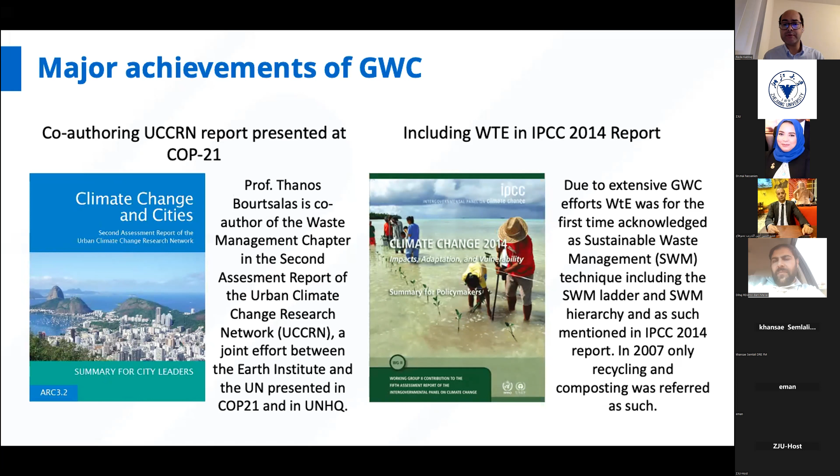As you can see, that's the report authoring that we supported for the IPCC in 2014, where we introduced waste to energy as a technology that is sustainable and necessary for the circular economy and for sustainable waste management.

Also, we have one of the most comprehensive databases of numerous publications and dissertations regarding advancing sustainable waste management, and it's available online on our website at WTERT.org.

Also, our founder and former director of the Earth Engineering Center, Professor Themelis, is one of the faculty winners of the Columbia University 2015 President's Global Innovation Fund, awarded for one of the greater projects we provided to waste management worldwide, which is a global report on advancing sustainable waste management in Latin America and disseminating these results to other developing regions. This guidebook is also available online on WTERT.

I advise you to go to the website and download it. It is available in several languages, and I'm currently working on the French one, which obviously could help francophone people learn about it. So the origin of this guidebook is in 2011.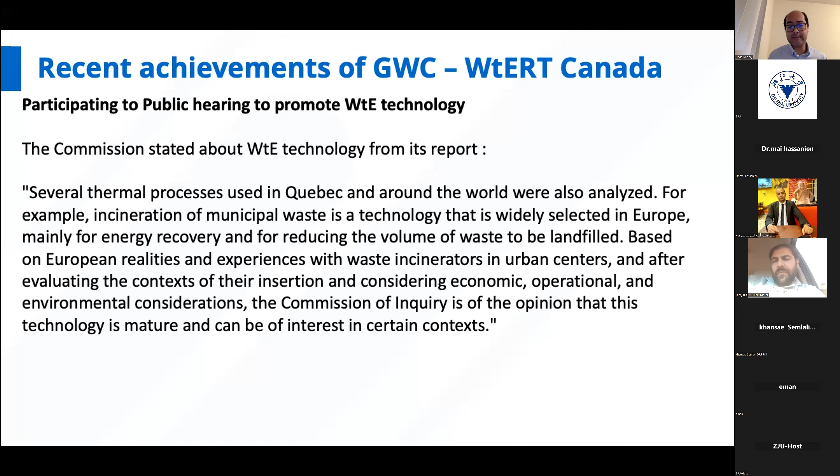So obviously, the Commission supports waste to energy, which we call incineration, but I think in terminology, incineration is not very good, because it is not only combustion, but we use the combustion to generate energy in the form of electricity and steam. So that's why I don't like the terminology of incineration, and mostly we use waste to energy. And they don't recommend other technologies such as gasification or pyrolysis, which are not suitable for municipal solid waste.

And this report is available. This is the website, this is the link. I'm going to share this presentation with you all, and it's available in English and also in French. So you can be inspired by 1 year of findings and a report that could be helpful for you for further investigation.

I just want to highlight one of the projects working in Canada, which is one of the waste to energy facilities located in Quebec. 2 years ago, the city of Quebec, which owns the facility, invested in a pipeline to supply the exhaust steam of the waste to energy plant to a hospital. And as you can see on the map, the waste to energy facility is linked with a pipe of more than 2.2 kilometers underground to supply the steam.

And linking the waste to energy facility to the hospital has saved a lot of money for the Canadian taxpayers.

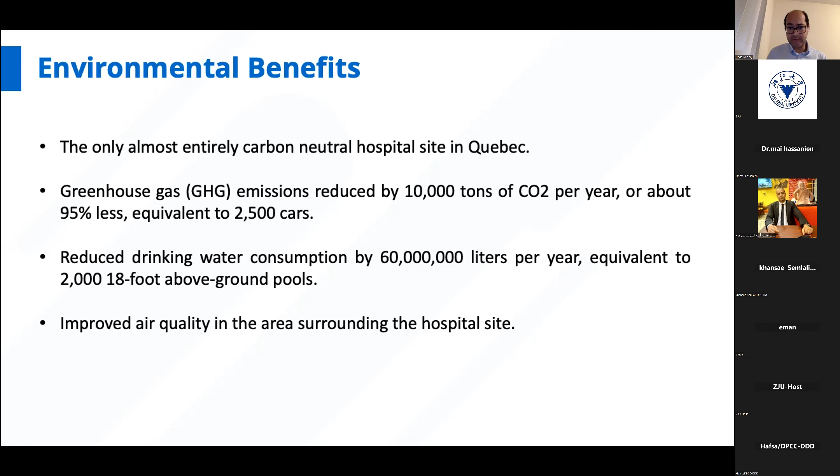It has also improved air quality in the area surrounding the hospital site.

The city of Casablanca in Morocco represents about 4.5 million inhabitants and generates 1.5 million tons of municipal solid waste. It is looking for an alternative to a small controlled landfill of approximately 35 hectares adjacent to the old non-regulated landfills in Mediouna.

Unfortunately, with the shortage of land for sanitary landfills and public opposition to landfills, waste energy is much needed for a big metropolitan city like Casablanca, and also for Cairo and Tunis. A science-based review of the facts would argue that waste energy is the only solution for Casablanca.

These are some pictures I got from a network in Morocco, showing the city of Casablanca itself. This landfill gathers 35% of Morocco's municipal solid waste in one place.

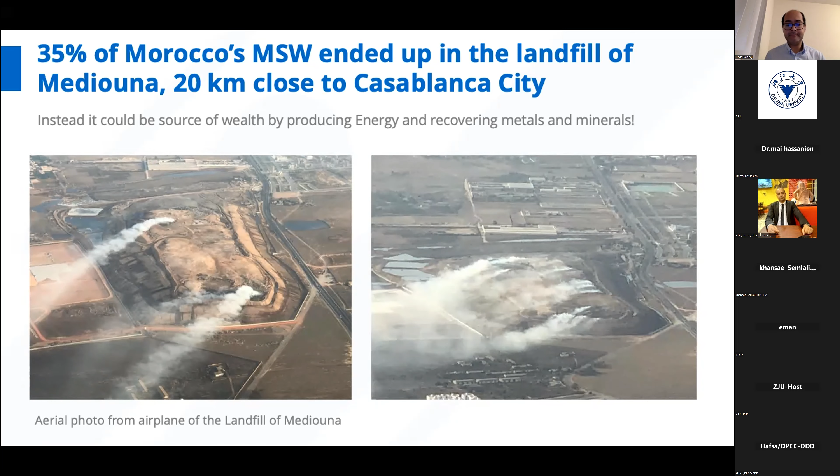One of the advantages of waste energy is that it has several benefits: the destruction of pathogens, the conservation of land, greenhouse gas emission reduction, and the recovery of energy and materials from post-recycling waste.

As you can see from several presentations, waste energy is complementary to recycling—there is no competition between them. The best countries in the world in terms of waste management both recycle and burn waste, such as Japan, Sweden, Netherlands, and Belgium.

It is not competing, but unfortunately there is a lot of misinformation, or propaganda, claiming that implementing waste energy facilities will harm recycling programs, which is false. Based on the facts and the data, this is absolutely wrong and nonsense.

Based on our research, what is the rational way of managing waste? Of course, there is recycling—this is the aim, as I presented earlier, the hierarchy of waste, which is based on source-separated waste. It can be used as materials or composted as a soil conditioner.

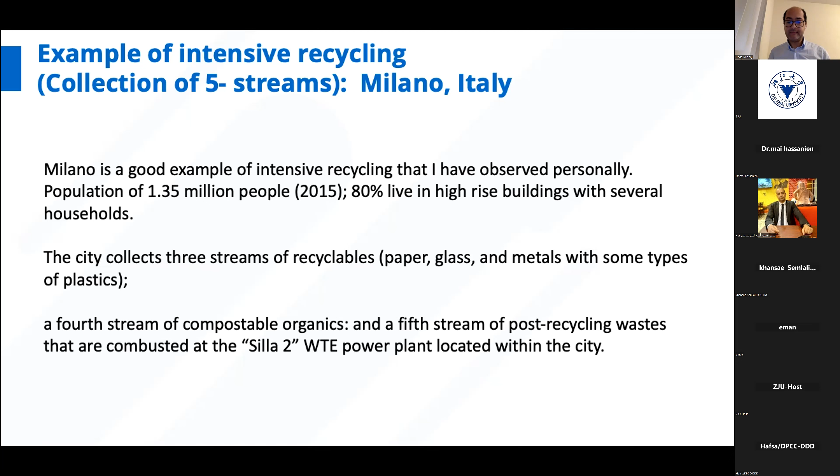The city provides 5 collection bins, each with a different color, to each multi-story building and each house. So for example, if you live in a building, in the garage you will have 5 bins; in a house, the same thing. The city also provides a small container for food waste that you can keep in your house, and compostable bags you can find in stores for 1 cent euro, which you can use for the waste container.

The transparent, white bag is collected twice a week. The yellow for plastic and metals is collected once a week. The white container for paper is also collected once a week. The green one, only for glass, is also collected once a week. And the brown containers for food waste are collected twice a week.

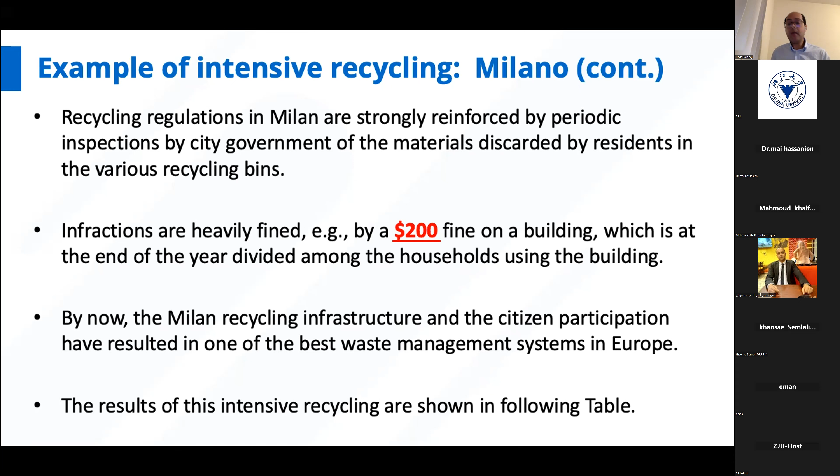And regarding compost, which is from the brown bins, it's approximately 17%. So the total recycled and compost represents approximately 40%. And the rest goes to the waste energy facilities - the city doesn't send any waste to the landfill.

Everything is managed properly. Did you notice something? All this effort by the city to implement 5 streams of sorting for recycling only achieves 40%. Only 40%, with all this effort to sort the waste, with control, fines, and regulations. So all this talk from associations saying we don't need waste energy, that only with recycling, only with reducing waste we can achieve 100% waste management - that is false.

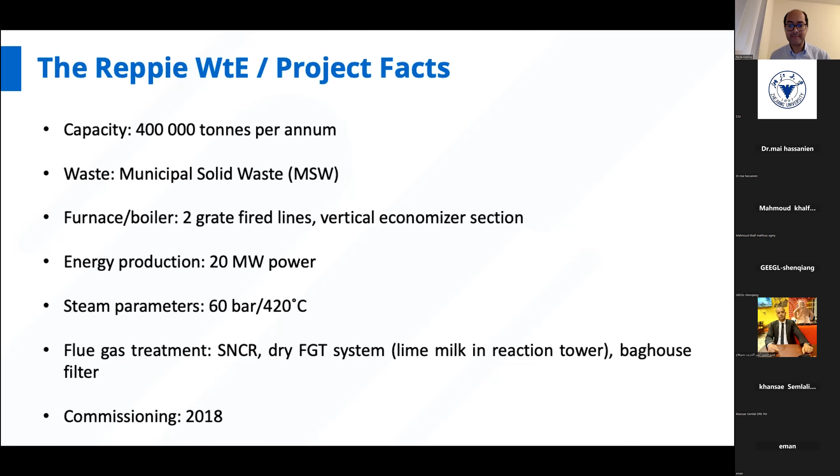Unfortunately, due to the context of waste management development in Ethiopia, there was an unfortunate event. Before, the city was using only open dumping, non-controlled, and on March 11th, there was an incident, a garbage landslide in the old landfill that killed 150 people and left dozens of others missing. So the landfill is a threat, not only regarding climate change, but also to human life.

Therefore, our aim is to support Africa, because we cannot leave the continent alone without support, with technology, with support, and leave them alone. Because if Europe is well developed and we leave Africa with no technology, without development, it doesn't make sense. We need to work all together to support the African nations.

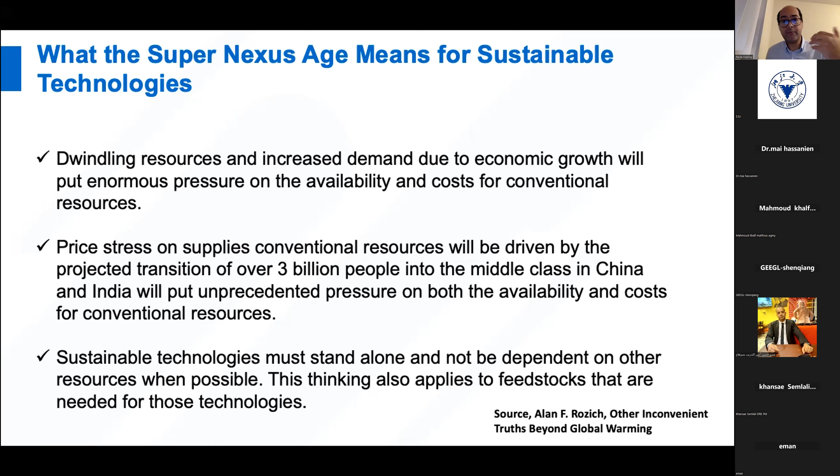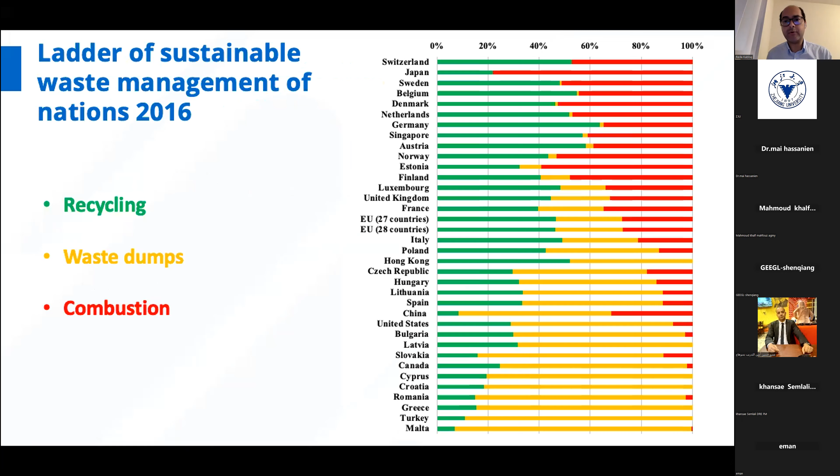Unfortunately, there is a lot of misinformation regarding waste energy in the US and other countries, suggesting we don't need either waste energy or landfilling, that 100% smart recycling is enough. But as we can see in the case study of Milan, with all the effort, it's only 40%.

So if waste energy facilities are much preferable as a facility, why does over 80% of global urban waste go to the dump or get sent to landfill? The first reason is that waste dumping costs practically nothing, compared to a sanitary landfill.

The sanitary landfill can be done for about $40 per ton, depending on the biogas capture, and also the high initial capital investment of waste-to-energy requires gate fees of $60 per ton when the electricity price of the grid is about $60 per megawatt-hour, not taking into account the external environmental cost of the landfills.

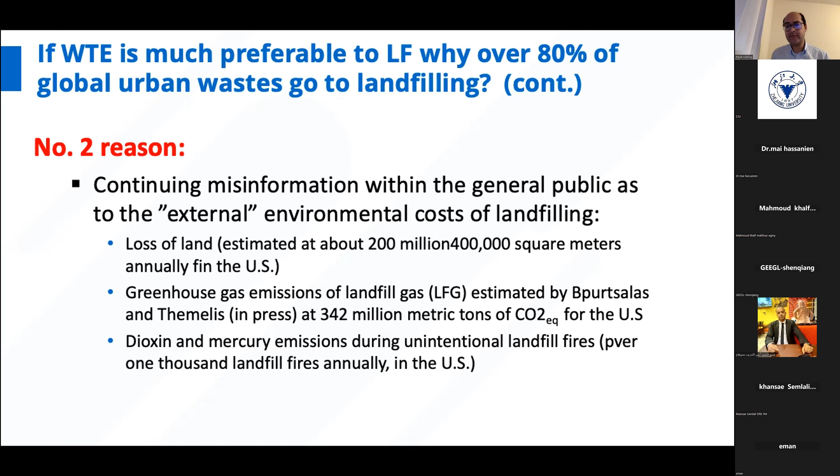The second reason is there is continuing misinformation within the general public about the external environmental cost of landfills. We studied at Columbia that there is a large loss of land, which we estimated at about 400,000 square meters annually in the US. The greenhouse gas emissions of landfills were estimated by Professor Themelis at about 342 million metric tons of CO2 for the US. And there are dioxin and mercury emissions; there were a lot of fires in landfills that generate smoke in the US.

So some other obstacles to the expansion of waste-to-energy facilities are the initial capital investment, as we mentioned, and also the gate fees, and all the challenges of the misinformation.

So basically, how China became the world leader in sustainable waste management is that China's rapidly growing cities were literally besieged by landfills. For example, the city of Beijing was literally besieged by 500 landfills around the city. And the state implemented the national five-year energy plan, which included waste-to-energy facilities, and they included waste-to-energy in the Belt and Road Initiative for funding.

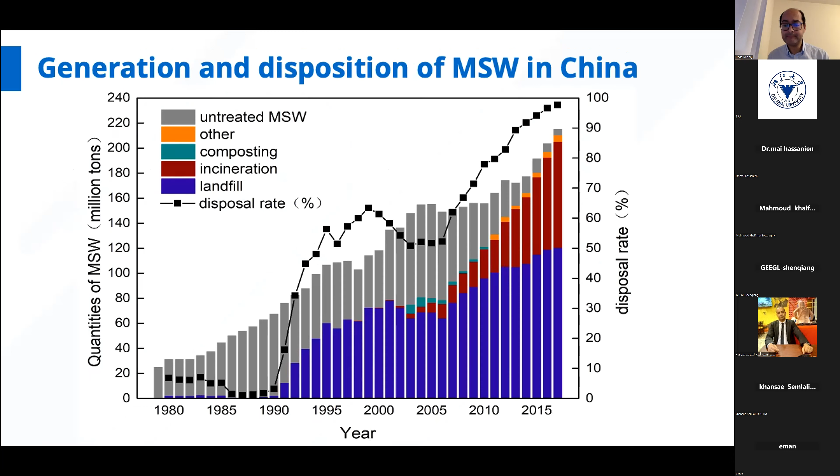As you can see, in the disposition of municipal solid waste in China, the rate of generating energy from waste is increasing over the 20 years. And the total capacity and number of waste-to-energy plants are increasing. There were more than 400 in 2022, but recently there are more than 470 waste-to-energy plants and more than 100 under construction.

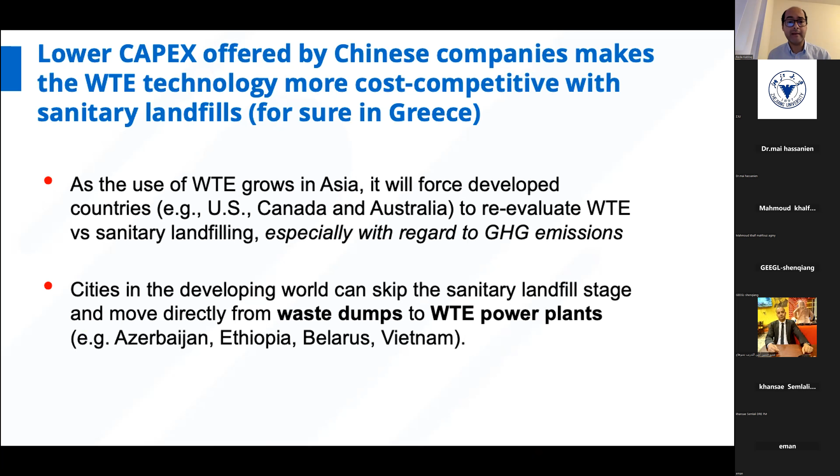So as you can see, they succeeded in lowering the capex, which makes waste-to-energy technologies more cost competitive compared to sanitary landfills. We studied the case of Greece and showed that if Greece goes for waste-to-energy facilities, it's going to be more competitive than landfills. And according to our study at Columbia, we analyzed several waste-to-energy facilities in the US, Europe, and China.

So I just want to mention here, according to one of the studies in California, why landfilling of waste is not a good option. As you can see, there is a lot of production of landfill gas. There is a lot of production of leachate, whose collection and treatment in the long term is quite expensive. And there are a lot of engineering barriers; large landfilling is not very sustainable. And if you invest in landfill, it's like you provide problems to the future generation.

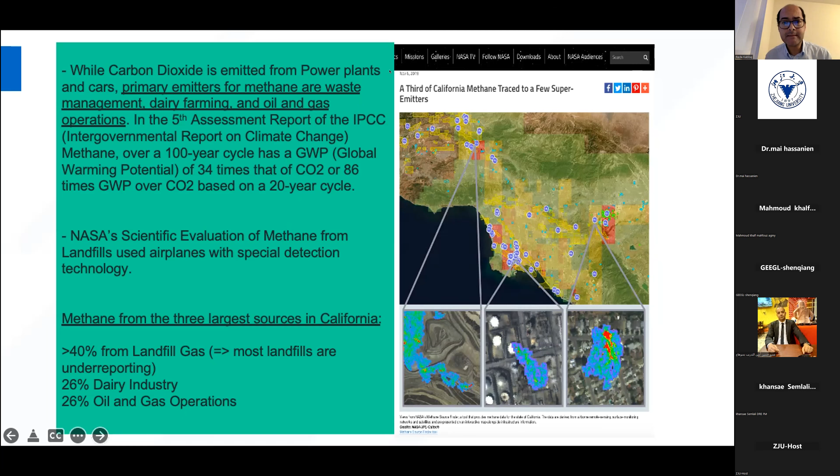So yeah, thank you. So basically here, I just want to close that Columbia has made some study about 6 MBT facilities in Europe that use different approaches for the recovery of material and energy from the mixed waste. And the result is we found out that these facilities are quite expensive, with a lot of investment, and they just recover a little bit of RDF.

So basically, we recommend, based on this report, which we can share with you, the findings that the waste-to-energy facilities using combustion have much higher valorization rates than MBT.